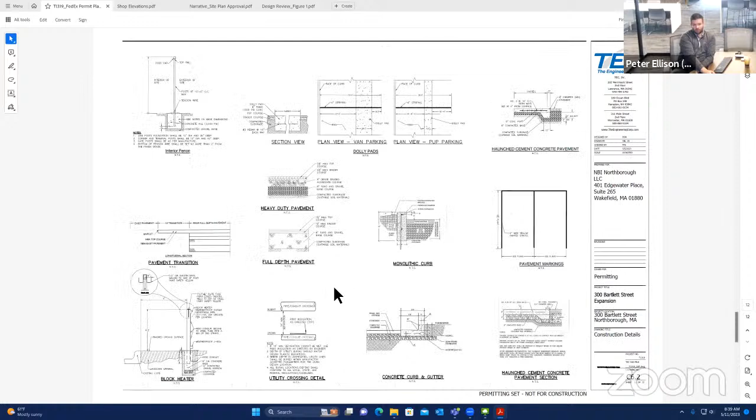Unfortunately, I don't have an answer on this one yet, other than we are exploring the feasibility of adding some metal shielding to the existing light poles that are out there. The issue raised is that because of the location of FedEx at the top of the hill on Bartlett Street, those light poles, although they're not necessarily sending light off-site or past the property line, there is some glare that can be seen from pretty far away, just because of the topography and the way the lights stand up at the top of the hill.

I've been working with my lighting designer to try and come up with a solution that would be a retrofit to these existing light poles, where we could add some metal shielding to prevent that glare, so you couldn't really see the lighting fixtures from so far away, essentially.

The tricky part of adding that after the fact is the design of these light poles. They're already pointed directly straight down, at a 90-degree angle. It's not like these are angled up and shooting at an angle at the site. So we want to make sure we're not going to end up with any dark spots within the existing parking lot. And once we have the final solution, we will pitch it to the FedEx operators on site and make sure they're okay with it.

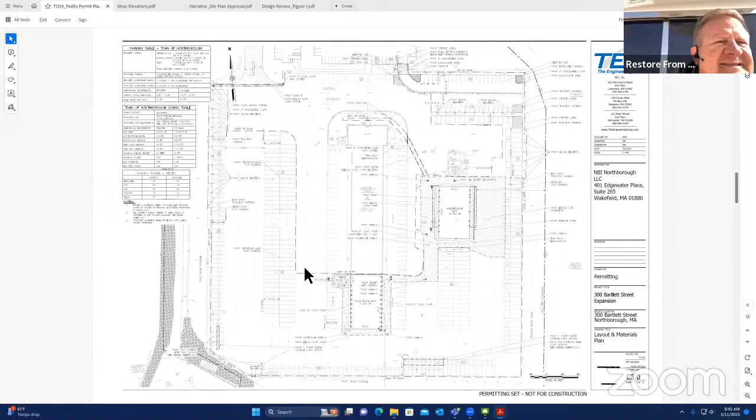Not much space, you really don't have much other choice.

Hey Dave, I'll butt in for 2 seconds. One of the things that we did notice...

One of the things we noticed was that since the hill was so high and the angle from Bartlett was so far down, anything put up only had to be about 6 feet tall, because your line of visibility wouldn't show any of the buildings behind it due to the angle. So a solid fence or bush as tall as 6 feet means you wouldn't see any of the buildings. It was nice that these guys were adding vegetation, but it's not flat where we'd need a 20-foot tree to cover a 24-foot building. We looked at the sight lines, and I'm throwing this out in case you have ideas, but because of the angle, you only need about 6 feet and you don't see any of the buildings, which is kind of nice.

Right, no I agree. We're planting between that and the curb, correct? Not on the other side. Yeah, it would be between the fence and the curb where the grass panel is.

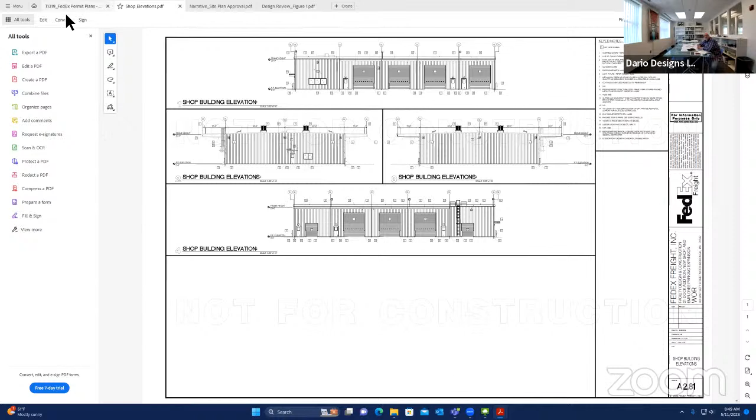Dario, do you have anything? Yeah, the only thing, and I appreciate you Peter addressing everything, is the site lighting. When you stand at Bartlett Pond, it's not really glare, I think you got it figured out. I'm not sure if glare is the right word, but you can just see the light fixtures, a big bright white ball in the sky, bouncing off the pond. So I think shielding it just from that one direction is all we need. I understand you have to keep certain foot candles in the parking lot for safety, but that's really all, it's seeing the fixtures themselves from there. I 100% believe that was not considered, not through trying to get away with anything, but who would think something a couple miles away would be able to see it. But it's because of where you are on the hill and how tall the fixtures are that you can actually see it from there. So I appreciate you guys looking at that.

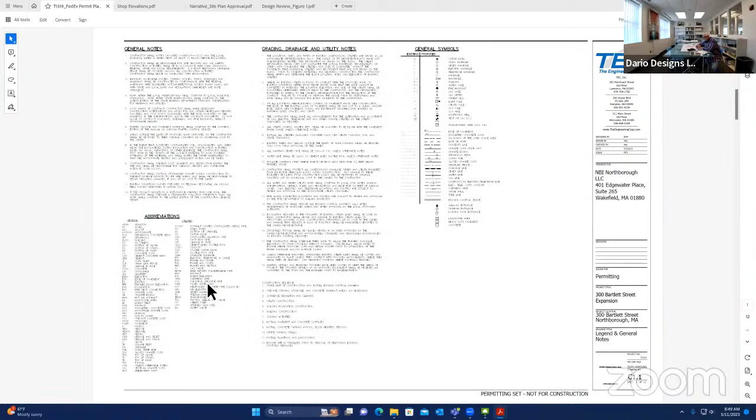Yeah, no problem. I think at a minimum we have poles along the western edge of this parking lot where it'll be very easy to incorporate shielding onto those poles, because we aren't worried about blocking light from anything to the west. Correct, but it's more the poles interior to the lot where if we added a 3-foot aluminum shield to the light, would we end up with a dark spot there? So that's the kind of thing we're looking at to make sure we don't end up with a safety situation.

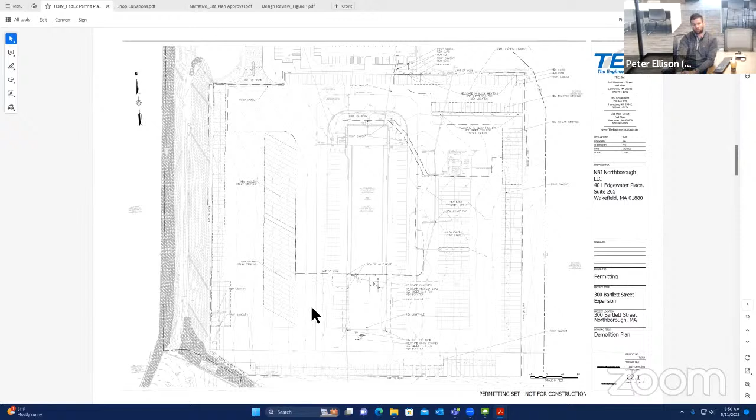Yeah, that makes perfect sense. And I think the ones on the west are probably the biggest culprits because they're at the highest part and closest to the pond. So that may work. Agree, thank you very much.

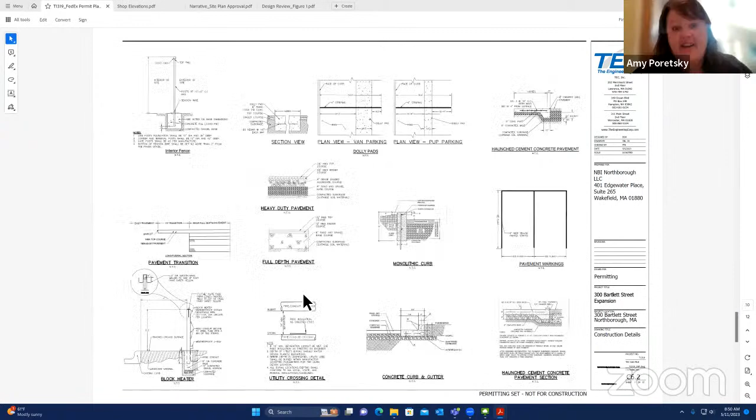I have a quick question. When you were talking about the snow and where to place it, in that 21 bays, was that building already erected and you're just looking to use the inside of it? Or was that a space where they actually used it for snow storage?

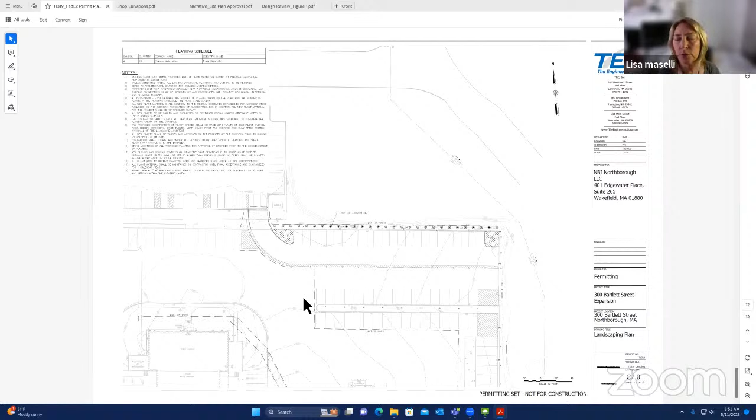Yeah, I think they did use part of that area for snow storage under their current usage out there. I can bring up an aerial that shows you exactly what it looks like today. But the good thing is that this site has so much parking and so much impervious area already that there's plenty of space to stockpile snow on site. It's not like they're at risk of not having enough parking.

They're so far above the requirements for zoning. And all the site visits that I've been on out there, there's dozens and dozens of open parking spaces on site.

All right, because I was just responding back to what Dave Barron had talked about with sliding it, or having difficulty putting it somewhere. What were you saying, Dave, about that?

Okay, I figured this thing out. Just concerned where the snow placement's going to go on site as far as the snow storage plan, because there's an incredible amount of asphalt up there, and where all that snow is going. That's my main concern up there.

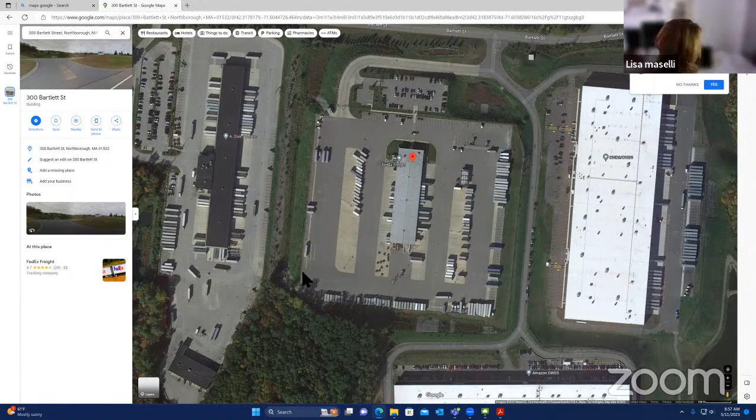Okay, so does that cover everything? Is there anything else missing? Don't think so. Okay, all right, so then we're all set.

Thank you for coming in, Peter. All right, thank you all. Have a good day. You too. Peter, good job. Thank you.

Okay everyone, next on our agenda at 8:58 is 305, 309 Main Street. Who will be the applicant? Who will be speaking for that?

I'll start, if I may. James Tetreault from Azimuth Land Design, representing SAL 305-309 Main Street LLC. Welcome, James. Thank you.

What are we going to do, Lori, as far as you being able to share the screen? Oh yeah, I'm sorry. You should be all set. Okay, so I can share screen? Yes, I hope this works right, I've got the two screens. I'm always terrified it's going to give this weird split screen thing. All right, let's see.

Looks good, we see the site plan. Okay, you can see it, I just can't tell whether you can or not. So, what you're looking at is the existing conditions plan.

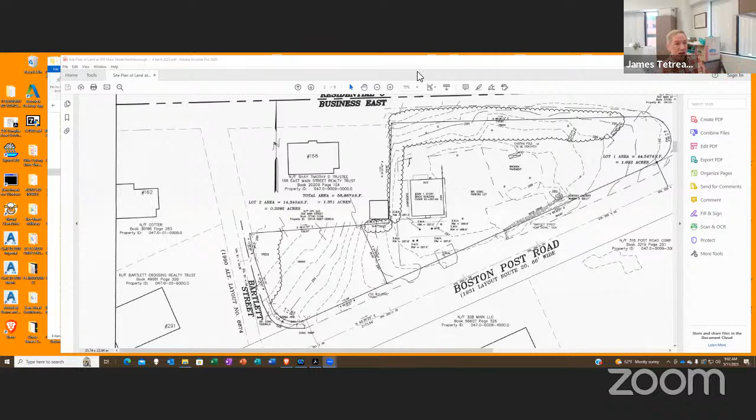We submitted site plans showing existing conditions. I'm going to jump a sheet here. That's the site layout, and as I'm moving the cursor around, that's the existing building.

In the area where 7 parking spaces are proposed on each side, this is an existing paved surface. We're going to resurface this and make it much nicer, and add parking spaces out toward the east end to handle demand that may arise from the use.

We've got proposed drainage collection that runs through a stormwater filter unit, with in-ground infiltration and detention out to the existing culvert.

We're not changing the footprint of the building. Tom Reardon will go into what is changing about its appearance, but it's going to be vastly improved.

We are adding a drive-through lane on the west side, which will have queuing for 9 cars. Actually, it could probably handle more than 9, but at least 9.

We're going to clean up the entrance on Route 20, where it's kind of extra wide with 2 separate areas now, so traffic comes in away from anyone leaving the drive-through lane. And we're going to add an entrance onto East Main Street over here.

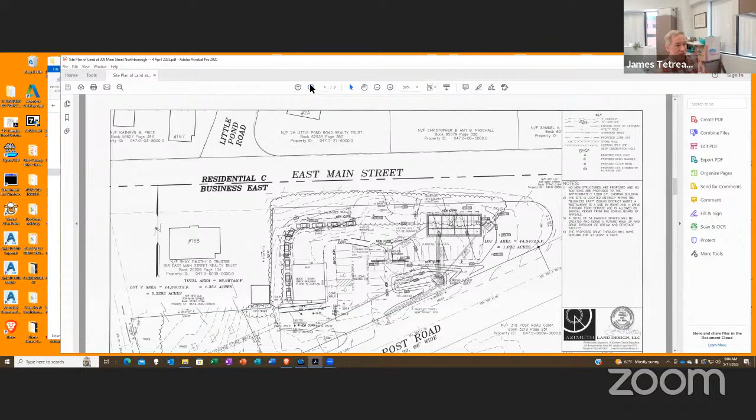Are you here, Larry? Yes, good morning. Can you hear me? Yes, good morning. Is it possible to share a screen?

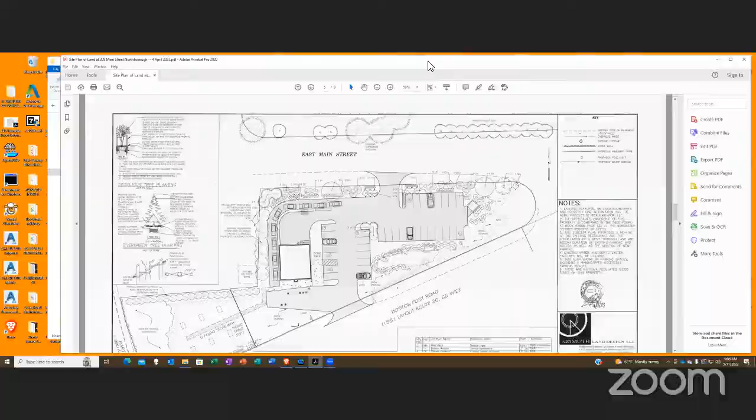Yeah, I'll stop sharing and let you share. Oh, you share so nicely. You should be able to now. All right, where am I? Let's see if I can get this around. I can't, hold on, sorry, I'm fighting this technology. Larry, if even I could do it. Can you see that drawing? No, let's try this - can you see that plan?

Yes, okay. Good morning, Larry Green. As Jamie talked about, I'm here to address the landscape plan. So I'm starting here with this plan.

This is basically an imagery of the proposed landscape plan, the landscape palette. You can see there's a lot of variety here, a lot of different blooming cycles, different textures, and varying plant communities of broadleaf evergreens, coarser texture evergreens, and ornamentals to provide a lot of winter interest.

So I just want you to picture this, and as I talk about plant communities, you can hopefully visualize what we were trying to do here. I'll try to share another plan - one moment. Sorry, I'm not this good at this technology. Can you see this? Yeah.

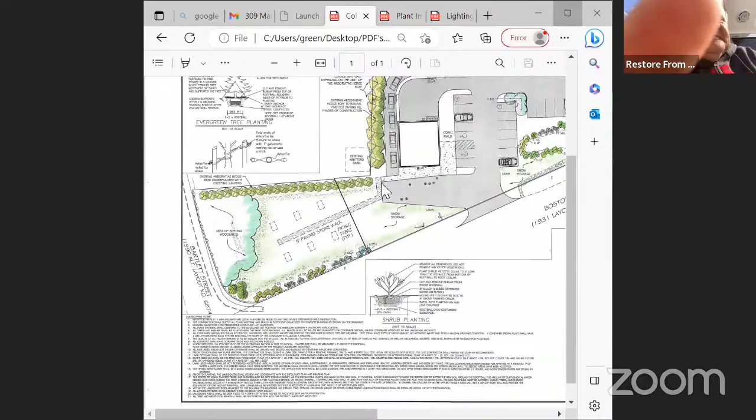All right, so here's the landscape plan. I'm going to work left to right, west to east, starting over in Bartlett Street, seeing this light green area - that's an existing wooded area we're preserving, acting as a buffer to Bartlett Street.

Within that, it's a good mix of honey locust and elm trees that we're going to preserve, giving a lot of good variety and coarse textures on the bark, but also a different leaf structure, a little bit lighter green - a neat little texture we want to preserve.

Above that, you can see this green here - that's an existing arborvitae hedgerow we're going to preserve. Working up in a backwards L shape, these existing arborvitaes are probably 30 feet high. We're also preserving those to act as a nice backdrop and visual screening.

Working our way along Bartlett to Route 20, in this lawn area, we're proposing plantings in this corner - a nice mix of blooming cycles: smoke bush, dogwoods, cypresses, spireas, winterberries, myricas, and 9-bark or physocarpus.

So that kind of gives you a good variety of colors and textures throughout the year, acting as a buffer in that corner. Working our way this direction, we're going to maintain this area as lawn for people to enjoy their drinks and ice cream, but I also wanted this area for snow storage as needed.

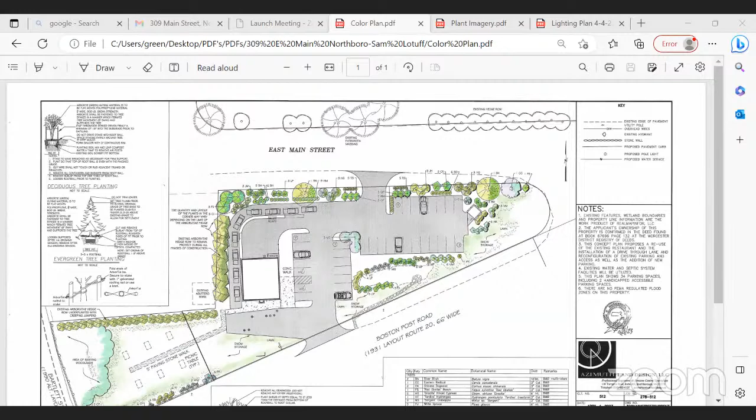That's some of my questions for now. And just touch on your point - you had your question on the cars by the drive-through and that abutting barn. If you recall, those existing arborvitaes right there are probably 30 feet tall, so it's a great buffer between that barn and that drive-through. And to piggyback on Larry's comments, that barn and the abutting property at 168 East Main are actually all set much higher than that drive-through lane. There's that also.

Okay thanks, Lori, did you have your hand up? Yes I did, I just wanted to speak to Lisa's question about the amount of open space. According to the zoning chart, they're saying that just shy of 59% of the lot is going to be open space, so the balance of the area, about 41%, will be impervious by their proposal. That's one comment I wanted to make.

As far as landscaping is concerned, it's a beautiful landscaping plan, especially along East Main Street. And I can appreciate the fact that you're buffering the dumpster, so I don't have to ask you to do it. And also the vegetation that you're proposing around the basin, I thought that was lovely.

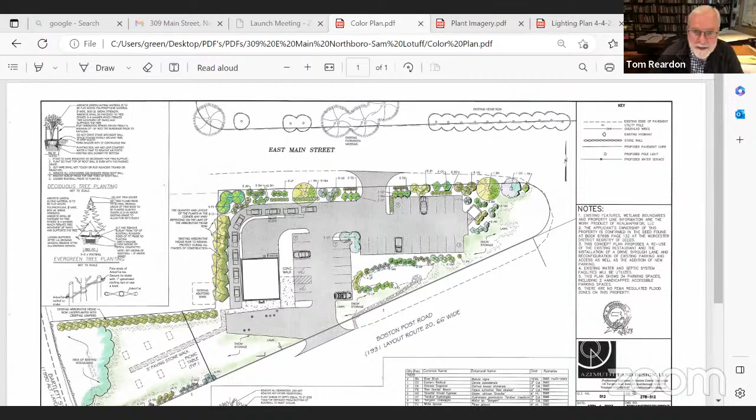Maybe we add a crosswalk onto the site of 168 from that existing sidewalk as well. We're talking about a couple hundred feet of frontage sidewalk. I don't think that's an unreasonable ask, and it's required in the zoning, so you'd have to specifically ask for a waiver. And who will maintain this new sidewalk? The town would maintain along East Main Street, and Route 20 is, of course, Mass DOT.

Okay, I agree with Lori. The sidewalk's really important with the use that's there. Me as well, I was going to bring that up. I'm glad, Lori, you're right on it. And I'll chime in, I think the sidewalk's important, really based on the use. If it was a bank or something, how many people walk up to a bank? But this could be a really cool thing for Northborough. We've had ice cream shops come and go, and hopefully this one will stay.

I'll do my comments. I can see the site from where I'm sitting, which is kind of convenient. And when we talk about street trees, I'm going to have to correct Lori - there aren't beautiful street trees across the street. Our landlord tore them all down. They've yet to be replaced. So hopefully, if we do them, I think the code said it's supposed to be in perpetuity, but all the ones that are across from us now have been cut down.

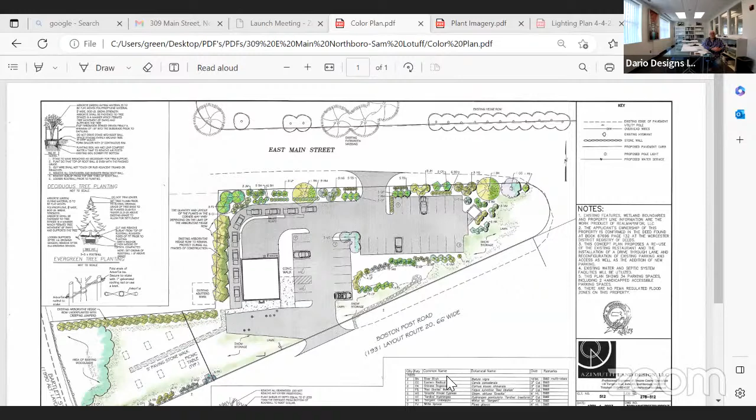A couple picnic tables if you want it on the far east side. I think that's all I have, is just make sure we don't block sight lines of vehicles, the sidewalk going in front of the queue of traffic, and then getting the freezer located exactly where, just so we know, because there's two different locations, one's the site, one's the floor plan. And if the trash can fit there and you put a little fence so people getting the ice cream don't see it or smell it, that would be great.

That's all I got, good input. And I know Tom has chimed in, but we want to give Tom a chance to explain about the building too.

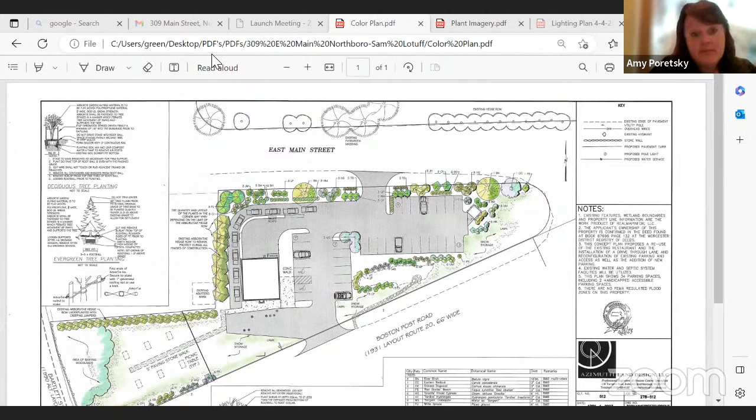Sure, sounds good. Tom Reardon Company. James, do you have the photographs of the existing building and the surrounding structures? I don't think I have them ready to queue up.

I've only got, I've got sort of one version here I can share of the building. I don't know, I think you sent some photos. I don't have those ready to go here, I apologize.

Okay, so this is the former Texas Barbecue, and we are facing north. This is the front elevation. There's an existing sign location, we're going to retain that sign location, we're going to replace that sign.

Do you have any other photos here? I have a couple photos that I took the other day. Oh okay, please, let's see if I can find them. Oh yeah, this is looking west, so that fake mansard roof has been removed.

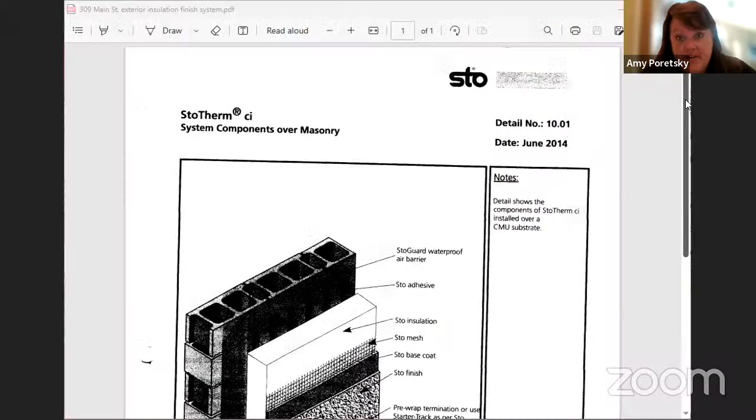See, I had this picture that came in, talking about the details. Oh, do you want the picture that showed the front of the building? Floor plans and elevations.

Oh, okay, let me see. I don't know if I have those pulled up. Let's see. Lori, those are on the website, right? I can try to see if I can download those. Yes, they should be on the website. I just have the pictures that you had sent the other day of the materials.

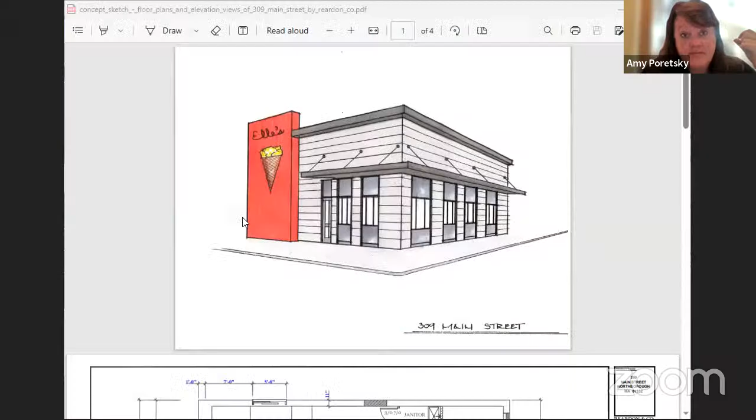So you want the - let's see. All right, I think I have it. Is that it? Can you see it?

Could you go to the floor plan below that? If you scroll up - all right, so this is the existing shell of the building. It's 40 by 45. As I said, it's concrete block, CMU block. There's one structural column in the middle. Otherwise, it's a wide open space.

On the lower section, which is facing east, those are the windows where you place the orders. Facing south on the left is an entry and exit door, and also where you would pick up. On the top of the plan in the upper left corner is the drive-up window.

The only new spaces created are for a small office and a bathroom and janitor's closet. And there is a future freezer located on the rear that is not sized yet, so we just plugged in something that's pretty standard, 8 by 16.

We are making some changes to the window locations. The two doors on front and rear are remaining. And the drive-up window and the pickup windows would be new locations, new openings.

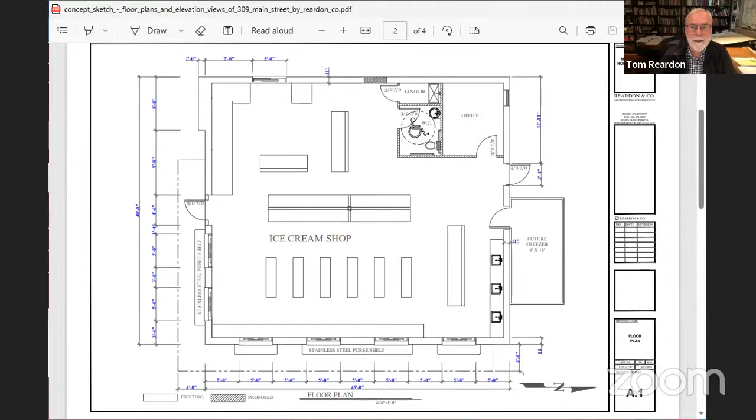So if we could go down to the next - right, so this shows on the right, the existing elevations, and on the left, the proposed.

So we have an existing concrete block building that's not insulated. So we're proposing using what's called STO, or exterior insulation finish system, on the exterior of the building.

So we're adding 3 inches of rigid insulation with a stucco finish. And we have an overhang to protect the people coming to the pickup windows, etc. As you can see, the existing front door remains the same, but we're changing the window locations on the south side.

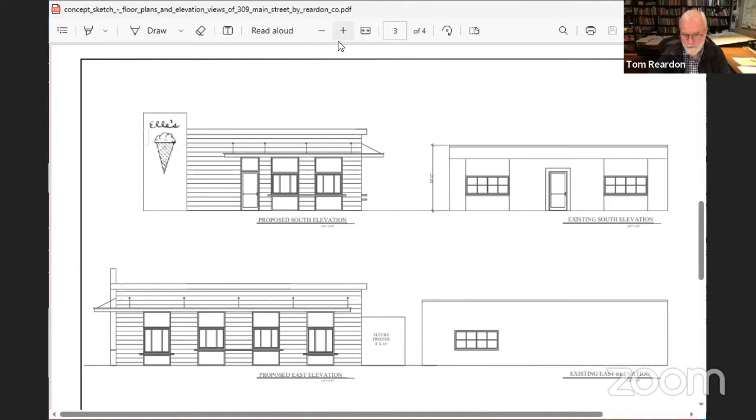On the east side, we have 1 window. We're going to add 4. The shelves are at different elevations to accommodate accessibility requirements.

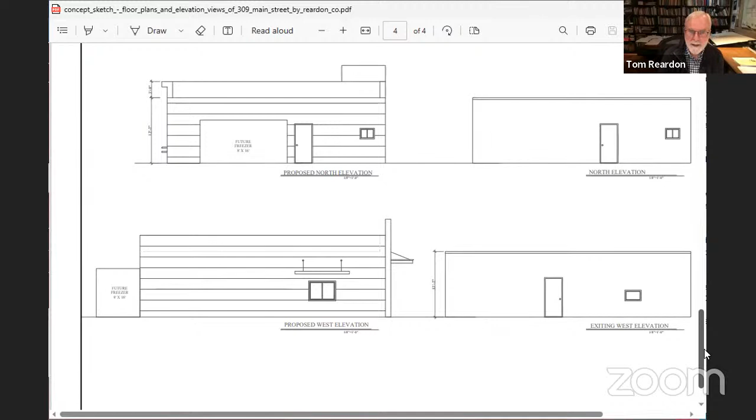If you go up to the next, you get the other 2 elevations. So the north is the rear. You have 1 small window that will remain in the office. You have the second means of egress and the future freezer location.

What you can see from this is that we are adding approximately a 3-foot high parapet wall above the flat roof, with the intent of placing the mechanical equipment on the roof so you won't have it visible from the site.

And that parapet is on 3 sides, east, south, and west.

The existing roof is about 12.3 feet high, so the parapet will bring it up to around 15, 16. And then we have a taller sign wall on the south elevation that goes up a little bit higher. So in terms of building size and elevation, we're well within the allowable for business east.

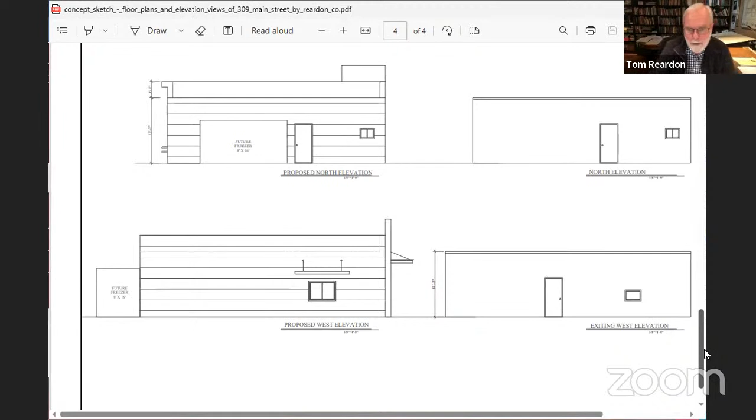The signage is being worked on by a graphic designer, so this is kind of a placeholder. I don't know what the designer will come up with.

The windows will probably be aluminum storefront in either bronze, black, or dark gray. We have panels above and below the windows, and these are sliding aluminum frame windows to allow the servers.

I think I scanned a couple of samples that Sam had made up that you have. The other detail drawing was kind of a cutaway view of how the exterior insulation is installed on the exterior of this concrete block building. So we think this is an appropriate design for the business.

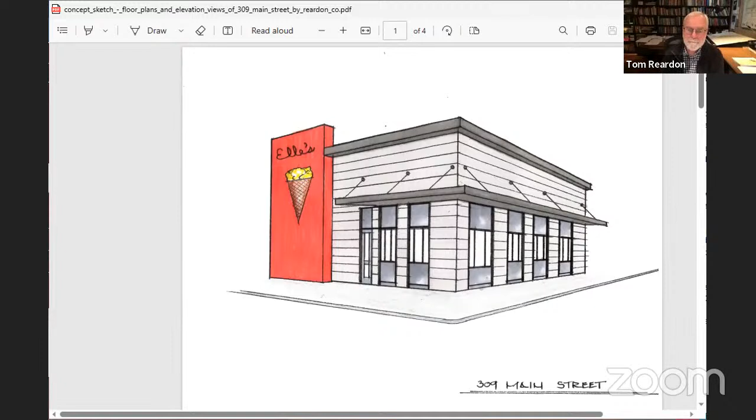It's kind of a cute building, but is it Northborough? I don't know, that's a tougher question. I'm looking out at the houses all behind it. I'm looking for my building.

I think Vina's is your classic old little strip mall building, directly across the street. And then if you continue over to Whitney's and everything else, that's pretty colonial and traditional. So I don't know where we're going as a town. Is it good to have a little diversity?

To me, it makes me smile, which is what ice cream does. I think it's very dangerous because I'm going to gain a lot of weight walking across the street. But I think that's my problem. It's a tough one for me, because I do like the design.

I don't know that it's appropriate, but we have a lot of different stuff. I think if that doesn't become a big menu and a distraction, it could be kind of a cool little thing. It's no different than the Golden Arches, as far as I'm concerned, but McDonald's a lot of times is still colonial. So it's a tough one, and I don't have a strong opinion either way. I don't think it's contextual, but I don't know that it has to be contextual.

That's kind of sort of where I am on it as an architect. Thank you.

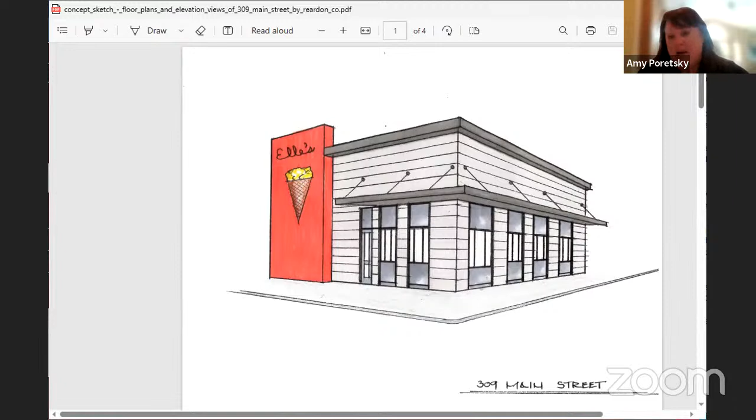Okay, so you'll go through the comment letter, and a lot of times applicants come back with the answers to the comment letter, and then we can review those. Yep, that's our intention, and we've gotten a lot of good input from you folks as well.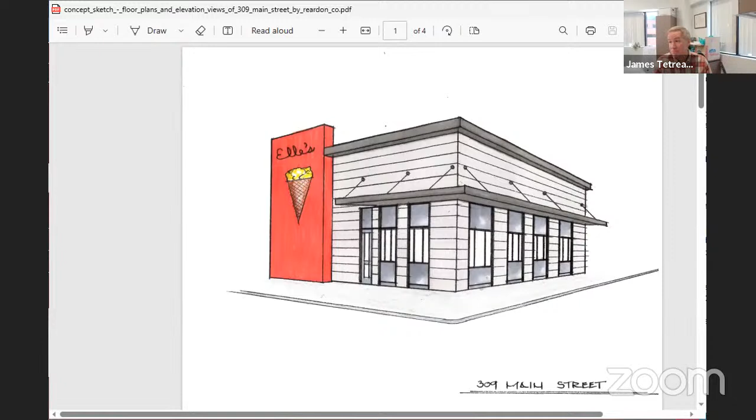Thank you. Okay, and can we look at the floor plan real quick, Amy? Sure, and I'm just going to pose this as a question. In the back to the right, where they have the freezer, so we could see to the right, because all the pictures are in the way.

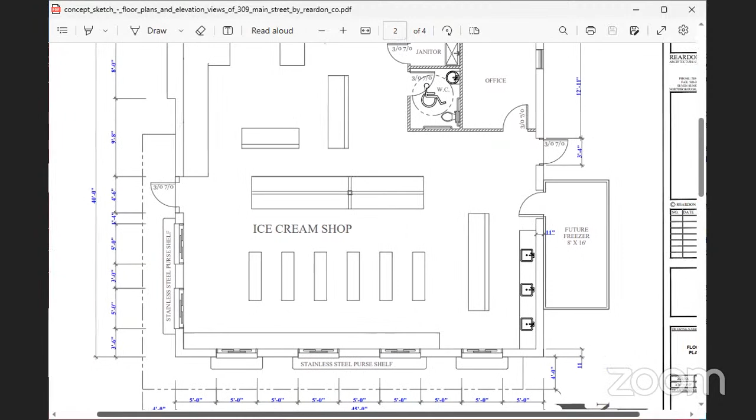There you go. Is it possible, guys? And I don't want to be a pain — if that freezer is end fed, so it sticks out perpendicular, and then right next to it is the garbage.

So all that stuff is behind, and then along that serving window, you just continue a little half wall or a fence or a screen. That could really keep all that stuff where we want it. And maybe you don't want it there, but dragging the garbage in the winter all the way across the parking lot's kind of a pain. I think you could use that corner and put a couple picnic tables there. It'd be really cool in the grass. Is there something wrong with that, or am I missing something?

James, this is one of the ones where if it really is broken and I'm missing something, I don't want to say do it and then it's such a hardship. I think the initial response was that we wanted to get the trash away from the customers, so they don't smell it.

Can I cut in here for a moment? Not only from a smell standpoint, but also from a rodent standpoint. Where we're coming from is we want to keep the facility interior as rodent-free as possible. The person doing business with us in the restaurant industry, his number one request was if we could move the dumpster away from the building to break the cycle of rodents going between the building and the dumpster, it would keep the property interior-wise healthier and cleaner. So the idea was to put the dumpster at the other end and nestle it in from a landscaping standpoint. I completely understand where you're coming from, just from a cleanliness standpoint, and from what the property was and where they had the dumpster.